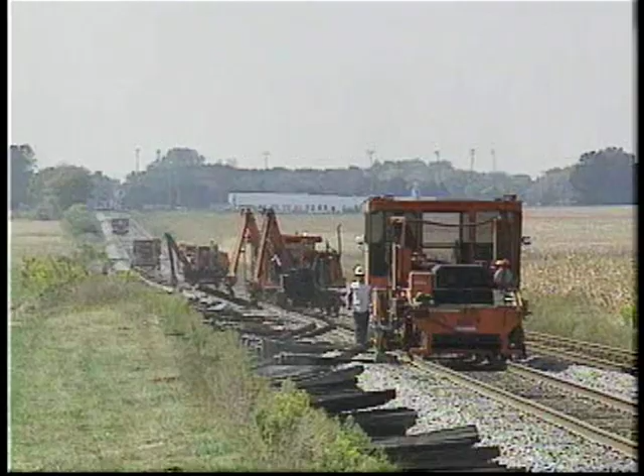On the track, we'll begin with a look at a modern work gang and their amazing parade of track machines. Tie and Surface Gang Number 1, Norfolk Southern's elite corps of highly experienced engineering and maintenance of way employees, is working across southern Illinois. These men are dedicated, fast, and excellent at what they do. They take pride in knowing that they are the company's best outfit.

The gang's job is to replace worn ties and then to resurface the line. This means to tamp ballast under the ties to lift the track level and to smooth out the alignment. To finish the job, ballast is groomed into the classic look of a high-speed mainline to aid in draining water away from the ties.

New cross ties have already been dumped along the line, and the first piece of equipment to lead the procession of machines is a tie crane. The crane operator positions ties near the location where an old one will be removed. The joystick controls respond to every movement, and the machine seems to become one with the skilled operator. Extra ties are placed on one of the carts. At a point down the line, these ties may be needed at spots where too few have been dropped.

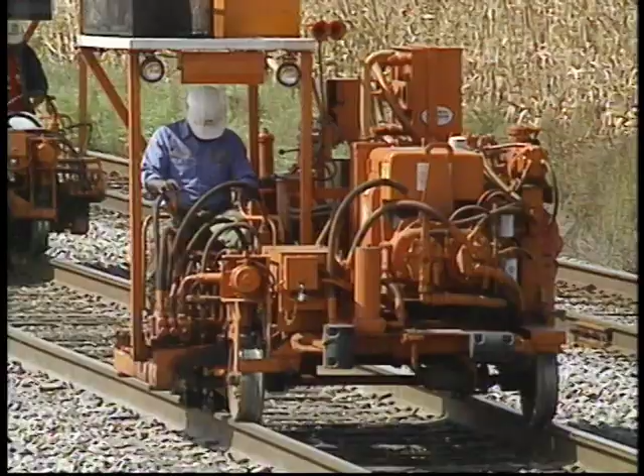Following right behind the tie crane are 4 spike pullers. These little machines pull spikes from the ties that are going to be replaced. Each machine pulls spikes from just one side of the track, but works both the inside and outside of that rail. The first 2 spike pullers will work a section and then leapfrog ahead to another section. The trailing 2 machines will work the section passed over by the first 2 pullers.

Hydraulics make a quick job of actually pulling a spike, but the operator must be skilled in placing the jaws of the puller directly over the desired spike. This is a task that often requires several attempts. Sometimes an operator gets in a groove and pulls several spikes without a problem. The little machines move right along, and in a good day, a T&S gang can cover several miles.

The removed spikes are dropped on the ballast and will be picked up by another machine, the spike loader. Here we see the strange-looking critter as it progresses along the line. Empty spike cans are stored on racks along the side of the machine. 4 large magnetic wheels pick up the spikes. A pair of wheels runs alongside each rail. At the top of each wheel, the spikes are forced off into a bin.

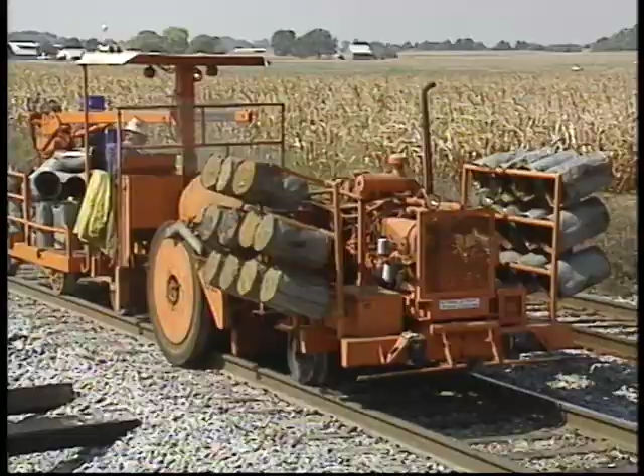From there, they ride into a rotating drum, which cleans the spikes by knocking off dirt and debris. From there, they are carried on a conveyor belt to the rear of the machine, where they are loaded into empty spike cans. Once a can is loaded, the operator uses the onboard crane to lift the can onto the back of the cart. The railroads today make a special effort to clean up all material and litter from a work site.

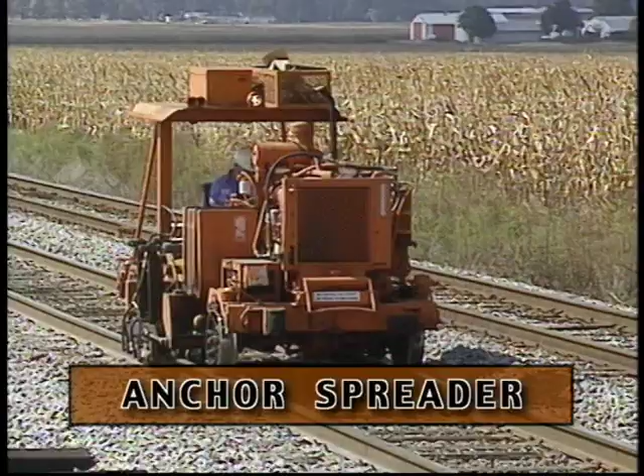Nothing will be tossed into the weeds or over a hill in today's world. The process continues with the arrival of the anchor spreading machines. The anchors are clips that hold rail longitudinally in place. A hydraulic press on this machine spreads the anchors apart to make removing the tie plates possible.

A close-up shows the anchor spreader at work, but it's difficult to actually see what is happening. The end result shows the anchor located several inches away from the tie and tie plates. 2 of these machines work together much like the spike pullers. Each machine has hydraulic presses that work the inside and outside of each anchor on both rails at the same time. A look down the line shows the next sequence of events that will take place.

A tie removal machine is busy pulling out the old ties that will be replaced. Behind that are 2 tie cranes that are picking up the removed ties, followed by another crane placing new ties at the exact spot for the insertion machine.

The tie puller latches onto and then lifts the rail to permit ties to be easily pulled from under the rails. The end of the puller grasps the ties as the arm of the machine drags them to the side of the roadbed.

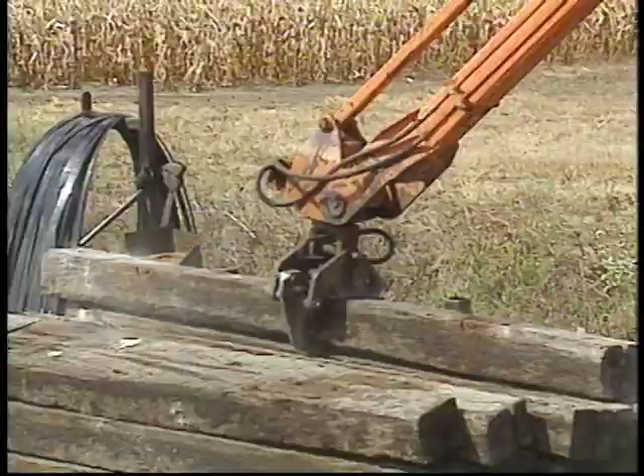Once 16 ties have been gathered, the man on the ground bands them with metal strapping. A spot is found where the bundle can be dumped without being in the way of the other machines. The cart is outfitted with a side dump platform, and the ties are shoved onto the ground. Rest assured that they won't be left here, however, as they will be picked up before the crew leaves the area.

The man doing the banding goes about his task as the tie crane moves down the line to keep pace with the other equipment.

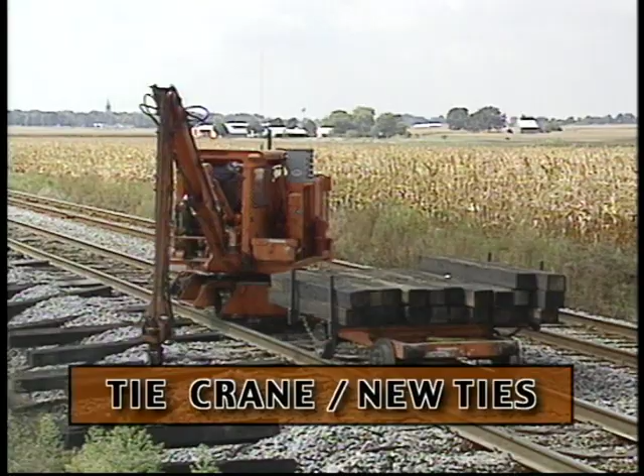Another tie crane follows, and its job is to place a new tie into position up against the rail for the tie insertion machine. Extra ties are carried along just in case the earlier operator missed a spot.

Again, note the skill required as the ties are placed in specific spots while the crane continues moving along the track. We speculate that these crane operators are pretty good at handling a computer game joystick.

When the machines get bunched up, it makes for a neat-looking sight as they go about their tasks.

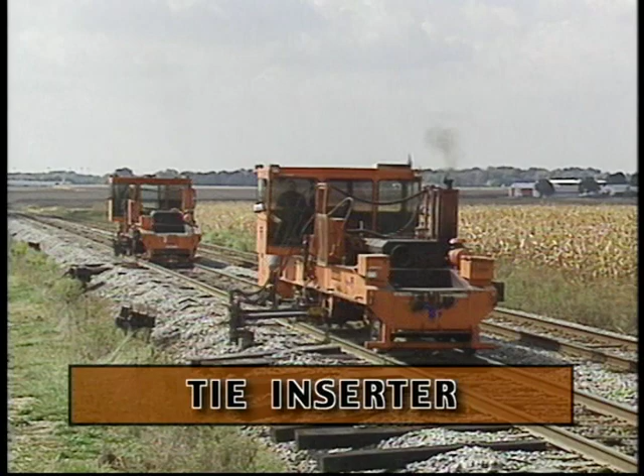Two tie insertion machines work like the other paired machines and leapfrog over a section while working the next part of the line. These machines are near replicas of the tie removing machine with one exception. Note that they do not lift the rail before inserting a tie. The powerful machine simply jams the tie under the rail to make a snug fit.

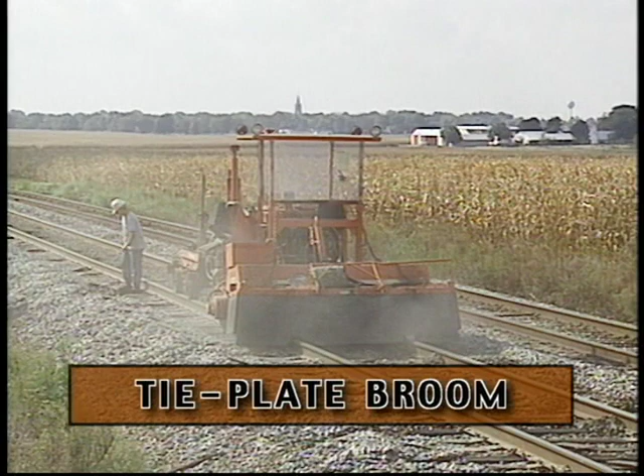A track broom follows to clean ballast from the newly inserted ties. It's necessary to keep rock off the ties so it won't get in the way when the tie plates are reinserted under the rail.

Rotating rubber brushes under the machine kick the rock off the ties, but also kick up clouds of dust. A man walking behind the broom controls the machine when necessary, but once a pace is set, the machine requires little attention. His primary task is to place tie plates into position for the insertion gang.

He uses a hook to help with the task and handles just one side of the track. Another man will do the other side ahead of the insertion machine.

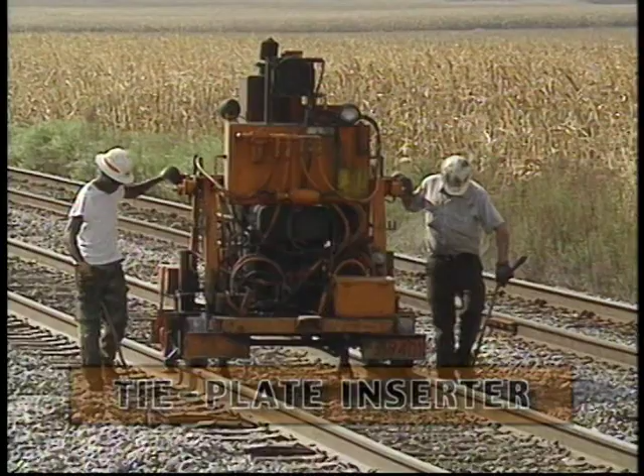Now, don't expect anything too elaborate of the plate insertion machine. It's mostly another manual task. The machine is there to lift the rail, but the plates are manually positioned by the two men.

The machine grasps the rail, and then jacks located on the bottom of the machine shove down on the tie. This action lifts the rail so the plates can be inserted. Again, hooks are used to handle the plates to save on back bending and fingers that might get smashed in the process. The trick here is to not get one's toe caught under the rail.

With new ties and tie plates installed, the next job is to spike everything down. Two automated spike drivers handle the task. Again, this is one of the jobs that requires a great deal of skill to line the spike up with the hole in the tie plate.

One man rides on each side of the spiker and is responsible for his side of the track. One spike is placed on each side of each rail on tangent track. On curves of more than 2 degrees, 4 spikes would be used. On severe curvature, heavier plates and spikes would be installed to hold the rail in place.

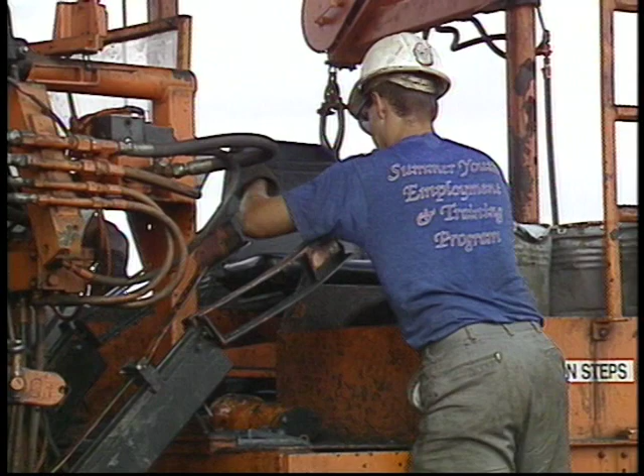The spike crew has stopped to reload. The procedure is much like loading a staple gun, but on a much larger scale. Once full, the spikes are lined up in their racks, and the crew is ready to go back to work.

Following the two automated spiking machines is a manual spike driver. The two men assigned to this machine check the line for missed spikes and ones that are defective or not driven in all the way.

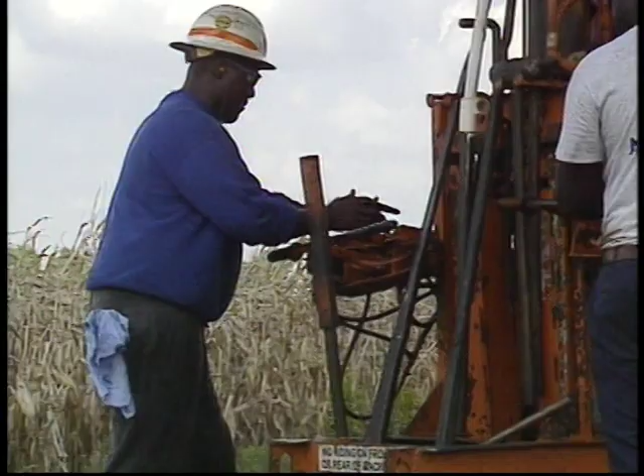Two more men on the ground walk behind the manual spikers to replace missing anchors on the rail. They simply place an anchor but don't have the equipment on their machine to press them onto the rail. This is done by another machine that comes along next. It uses a hydraulic press to squeeze the anchors around the bottom of the rail.

Once this group has finished their work, the track is ready to be resurfaced. We'll return to this same location the next day to cover the operation of those machines.

When a track gang on Norfolk Southern goes out to work in the field, they go as a fully self-contained operation that resembles a military campaign. The men eat, sleep, shower, and watch TV or relax in specially equipped truck trailers.

This is the kitchen trailer, where all of the meals are prepared by a full-time staff. One of the cooks is preparing soup for the evening meal and pulls flavor pouches from the steaming stock pots.

The men eat well on these work gangs too. This pile of thawing steaks will be for the evening meal. Next to the kitchen is one of the trailers housing a dining hall.

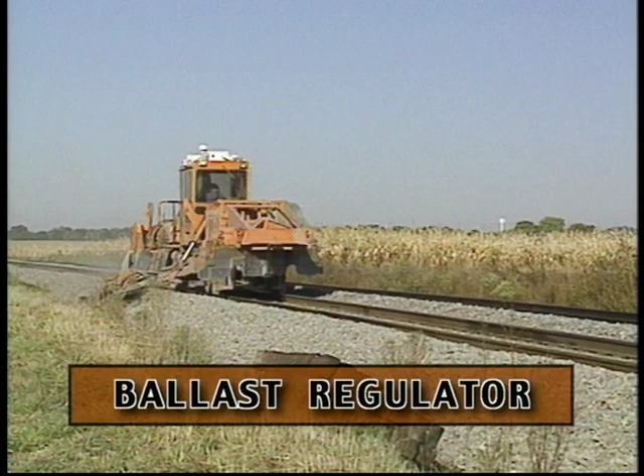The next morning we pick up where we left off and watch as a ballast regulator works the line. This regulator is piling ballast onto the track for the tampers.

Four tampers will work the line to squeeze ballast under the track, lifting the level of the line 2 inches on tangent track. The purpose of this operation is to smooth the surface and to correct any misalignment.

The box atop the end of this tamper sends a high-intensity beam of light back to photocell receivers on the main portion of the tamper. This tells the machine operator how much lift has been applied to the track level as it works the line.

While the tamper continues working, a westbound freight comes past the site. It's fortunate for the crew and the track gang that they are working along a passing track. Otherwise, either the train crew would be held up, or the track gang would have to get in a hole somewhere to clear up - a necessary time waster for all involved.

The tamper sticks its vibrating tongs into the ballast and squeezes the rock up under the ties. As it does this, the tamper also grabs onto the rail and lifts it up.

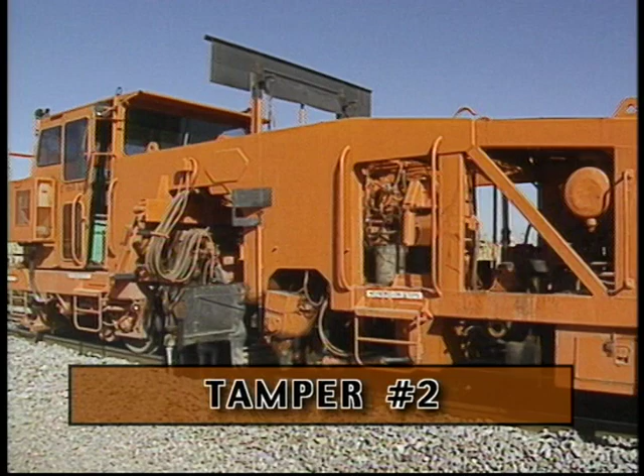The first of the two smaller tampers is also doing every third tie, and as you can see, doesn't operate with the light-sensitive measuring equipment. The fourth tamper is only used to make corrections to skewed ties, and therefore does not always have work.

Behind this tamper is a man who checks for any further problems with spikes or anchors. When he finds a spike that's not been driven in all the way, he has to resort to manual labor to drive it. This is a task that takes us back to the earlier days of railroading.

A machine called an anchor masher follows the last tamper. Its job is to squeeze the anchor snug against the tie plates.

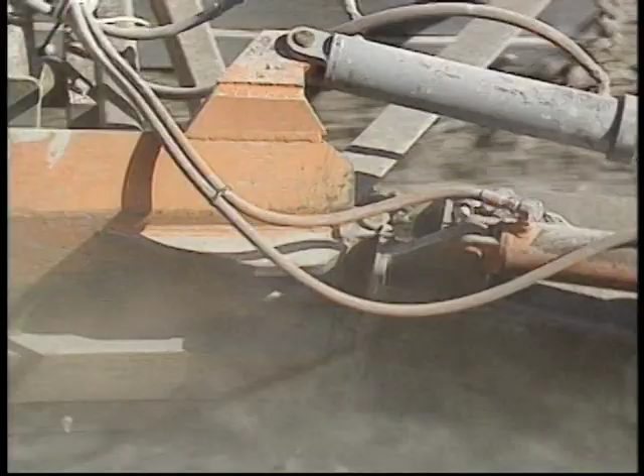On the next pass, the regulator has lowered its plow blades to clear a portion of the rock out from between the rails.

This time, it will use the front blade as a wedge plow to get more rock off the track and shift more ballast over to the south side of the line.

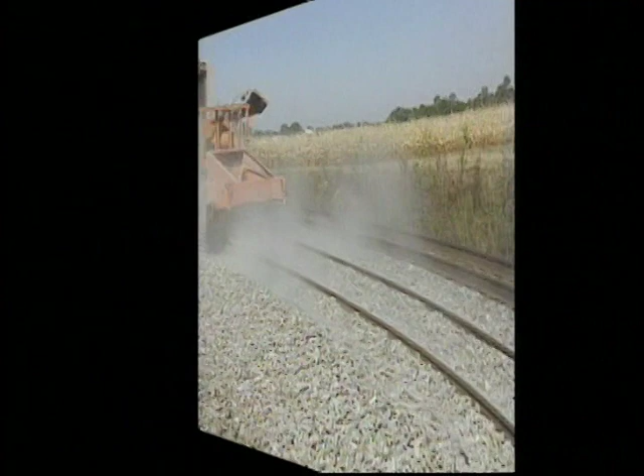Coming forward again, the blades have been adjusted to keep plowing rock to the south side.

Reversing once more, the rock continues to be shoved to the south side of the line.

Now coming forward, the blades have been formed into a wedge to evenly place rock on both sides of the rail. The side blades smooth out some of the lumps along this side.

This just about does it for moving ballast. And now the unit brooms the rock as it backs up.

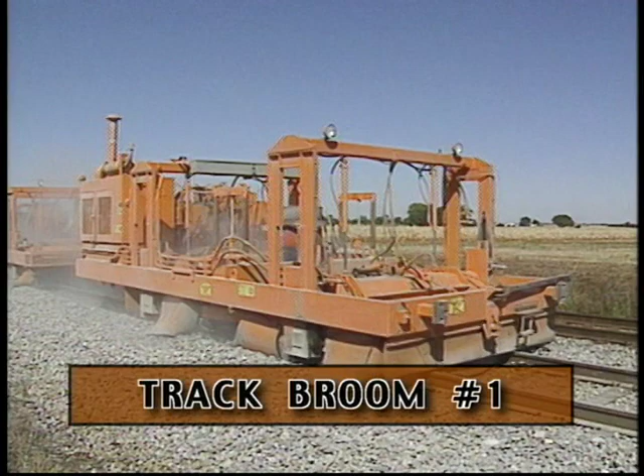This set of brooms has no operator on board, but is controlled by a man on the ground. Each broom has a specific purpose. The first kicks out most of the rock from between the rails. The second broom plows a channel of ballast from the end of the ties and cleans the portion of the ties outside the rail.

Once the dust has settled, we get a view of the freshly resurfaced line. Looks pretty good, and it's now ready for some high-speed running. Just one more task remains to complete this job, and that's to remove those piles of bundled ties.

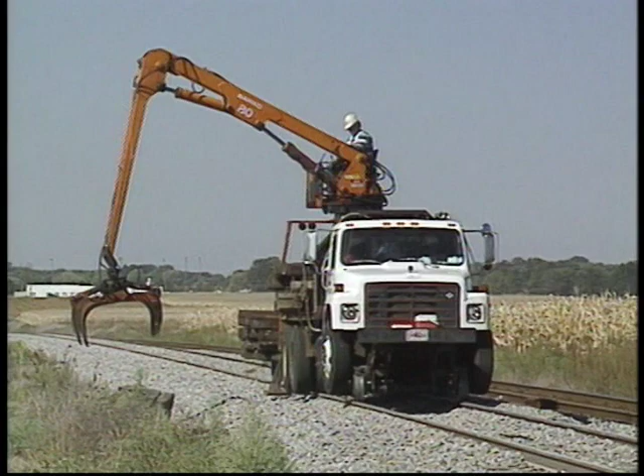A specially outfitted high-rail truck with a crane and pulling a trailer now arrives to collect those old ties. The operator swings the boom around and signals the driver to pull ahead to the next bundle. The forks latch onto the next 16 ties, and they're lifted aboard the trailer to conclude our look at the operations of a timber and surfacing gang.

Deep in the heart of Norfolk Southern coal country in southwestern West Virginia, we watch as a train of empty hoppers is hauled up a branch toward a mine. These gray-colored hoppers, called Top Guns, have become quite familiar in recent years to observers in the eastern part of the country. Norfolk Southern undertook a major program and rebuilt a total of 17,052 of these hoppers from older cars like these seen on the rear of the train.

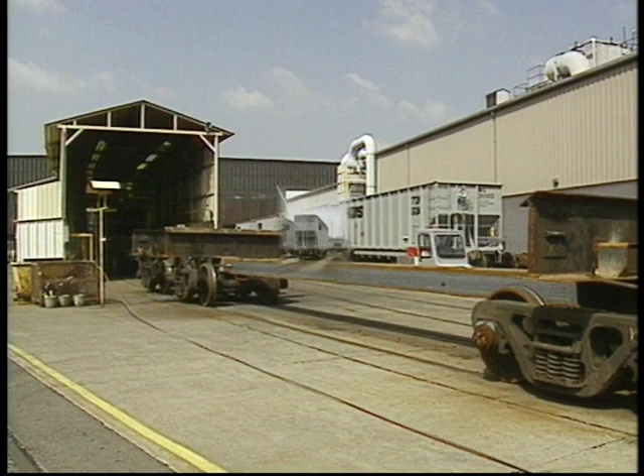The old cars are completely stripped down to just the center beam and bolsters at another location in Roanoke and then hauled to the assembly shop. Reusable parts such as brake valves are sent to other shops to be rebuilt and then returned here. Trucks are also rebuilt. Some cars are so deteriorated that even new center beams need to be built. All parts are identified with the car's serial numbers.

Before the assembly line begins to move, warning sirens sound to alert the workers. The line moves forward one car. The process starts at the end of the line and works back here to the start. The first stop is where cars are prepped to go onto the line. Rough edges are ground smooth, and if any holes need to be placed in the center beam, a plasma arc cutting torch is used for the job.

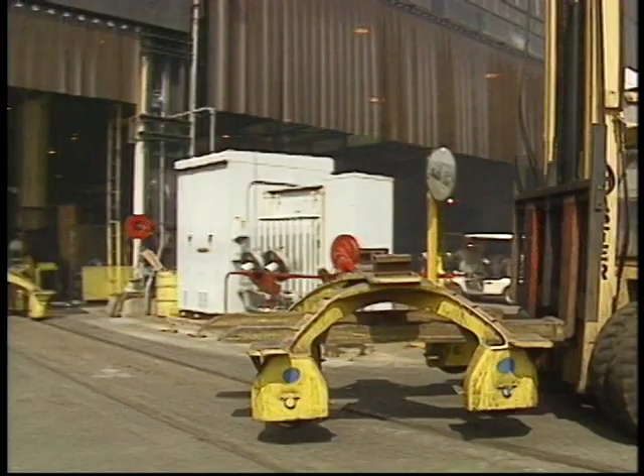The center sills will be removed from their trucks and ride on these shop bogies along the assembly line. Inside the shop building, the first station prepares the male center casting. New metal is added where it was worn to bring it back into specifications.

The coupler pockets are prepared and new angle iron is attached to the center sill. These braces will help support the floor and sides of the car. You can see that we are about 3 stations down the line now, and the car is ready to have the bottom attached. An overhead crane lifts the chassis over to the station where this will happen.

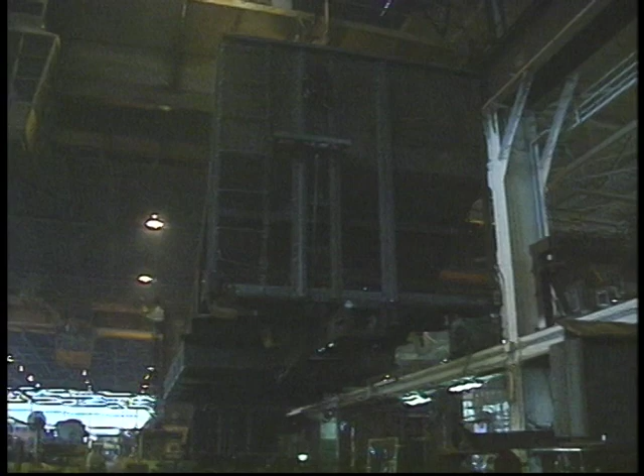Once both end pieces are attached, the car is lifted back to the line and placed on shop bogies again.

The line moves forward, and at the next station, the car will have welds required up to this point completed. Offline, we see side panels being built as they come through a giant press. A couple of men work with massive drills, boring holes at specific locations in the panels.

Welders begin the task of sealing all the seams on the car. On the other side of the building, more welding is being done on almost completed cars near the end of the assembly line.

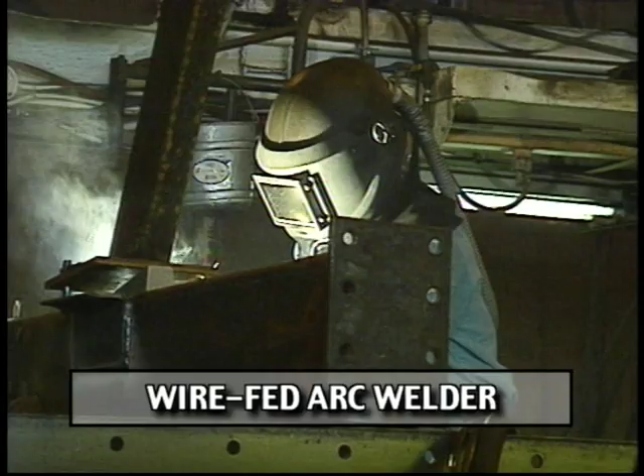Major welding gets underway now to attach inside bracing before the sides are brought over. The electric arc welders are wire-fed, meaning that a continuous feed of welding rod is automatically fed to the tip of the welder. This makes the job go much faster, since the welder won't have to stop work to pick up another rod.

At the far end of the building, a crane has just picked up a side panel and is headed this way with it.

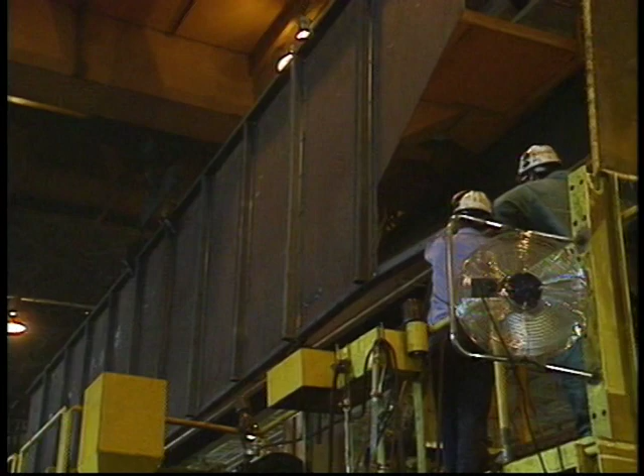The crane lifts the panel up high to clear the rigging of this work bay, where the panels will be attached to the car. The sides are slowly lowered into position, and a worker guides the panel to just the right spot. A rivet is quickly placed in a pre-drilled hole to help hold the panel in place.

At the end of this portion of the line, cars are pushed onto a transfer table and moved to the return portion of the line. The cars now have the final shape of a coal hopper, and on this line they will have the rest of the welding done and all of the appliances added, such as air lines, brake valves, reservoirs, ladders, grab irons, hoses, and so forth.

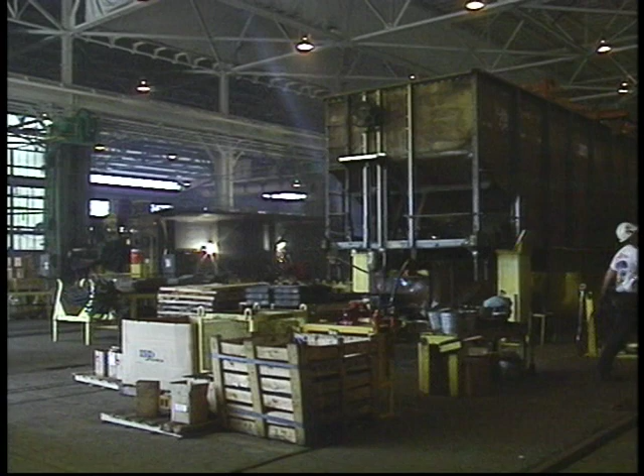We've relocated now to the end of the line. The car in the background is having the final welds done. After the next station, the cars are picked up by a crane and moved offline to the next to last station before the paint shop.

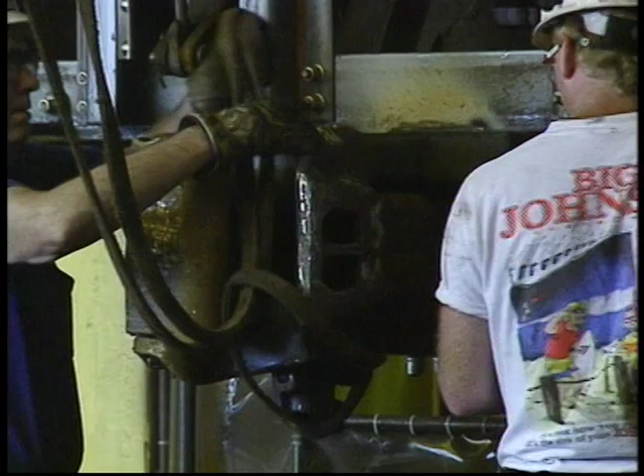Here, couplers and air hoses are added, and we watch as a coupler has just been placed on this car. All that remains is to place the completed car on its trucks now. The rebuilt trucks are rolled onto the shop floor and must be turned to line them up with the shop tracks.

One at a time, a winch pulls the trucks onto a miniature turntable where they will be turned. The second truck is turned, and then the pair are chained together, and another winch pulls them ahead to the final station in the shop building.

Soon, the overhead crane lifts the newly constructed car body out of one bay and onto the trucks. Some final adjustments will be made once the body is in place, and several more items will be completed before the car is ready to enter the paint shop.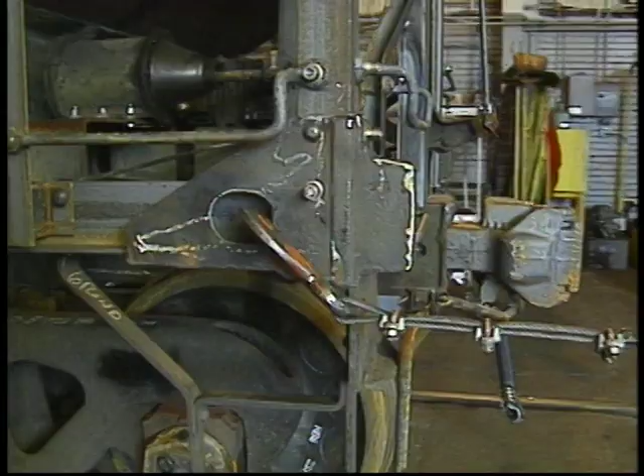The car is painted gray in an automated process that is impossible to shoot due to the way the paint is applied and the environmental recovery system in the downdraft water wash spray booth. The special paint does not require the bare metal to be primed. Once the car comes out of that bay, it's ready to be stenciled, and the Norfolk Southern logo is painted onto the side panels.

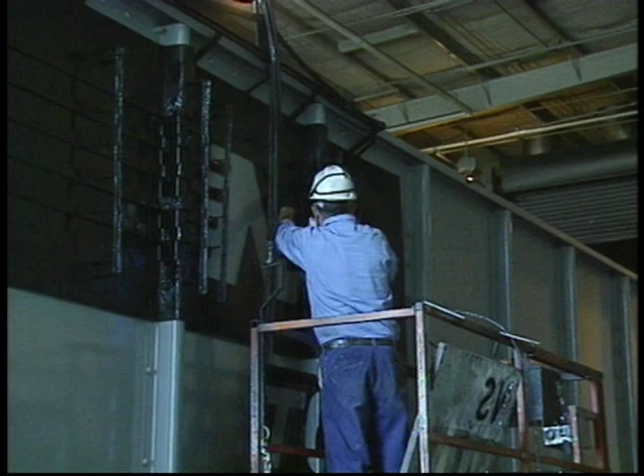The big stencils are removed by a small overhead lift, and then the car number is painted using handheld stencils. All of the other information seen painted on car sides is added to complete the job, and car number 31101 is now done. In a couple of days, it'll be in the coal fields, earning revenue for the railroad.

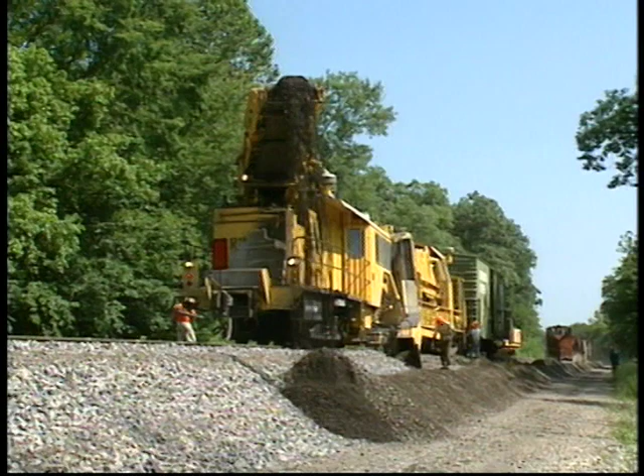During the summer of 1998, Burlington Northern Santa Fe undertook a major construction project to rebuild its Thayer subdivision in Arkansas and Missouri. The busy line was completely shut down for two weeks during what the railroad called the Blitz. One of the project goals was to undercut approximately 40 miles of track.

Undercutting is exactly what this massive machine is doing. As it slowly moves up the line, dirt and debris are removed from the ballast and discarded to the side of the track. How this material is extracted from underneath the cross ties is the really neat thing about an undercutting machine.

Scoops located on each side of the undercutter collect material and transport it into a vibrator which separates the ballast from dirt and debris. The material is removed from under the track by a mechanism that resembles a large chainsaw blade. Large teeth rotate on a band that is suspended under the track. As the teeth whirl around, they kick out the ballast and debris for the scoops to collect. A metal wheel on the machine lifts the track while the undercutter blades are moved along underneath the ties.

The view from behind the scoop shows concrete ties suspended in the air as the track is coming back to rest on the ground. It's nearly impossible to see any part of the actual undercutter blade while the machine is working.

Notice the different level of the track before and after the dirt has been removed. Fresh ballast will be dumped on the line after undercutting is complete, and then the line will be tamped and regulated to complete the job. The vibrator separates good ballast from the dirt and debris, and then the junk is moved by conveyor belt off to the side. On this particular portion of the line, there is not much ballast left. This is one of the reasons the line needed to be rebuilt.

Inside the climate-controlled cab, the machine operator adjusts controls and constantly checks on the machine's performance to ensure that the job is being done correctly. We'll take a moment to just watch as the machine continues to work up the line.

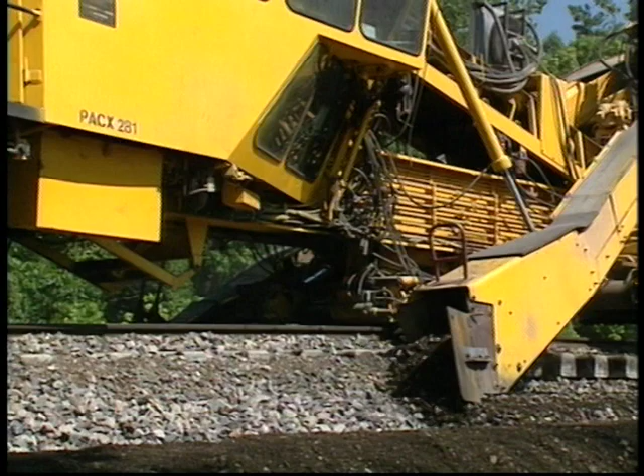This unit is an impressive machine, but not the largest of undercutters. Take a look at this one, which is also operating on the Thayer Blitz. This machine is actually a series of machines working together.

The first section is cleaning ballast from along the sides of the track, but is not undercutting. The second section is an undercutter and is working just like the smaller version.

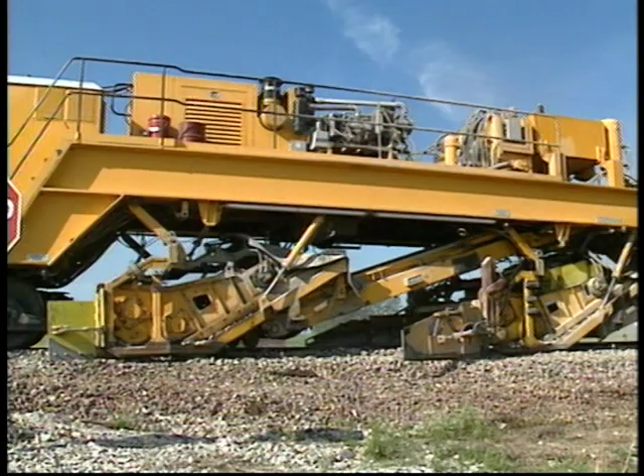Plows along each side of the first section move ballast into the center of the track, where it's picked up and moved into trailing vibrator cars. The material is moved from one car to the next on a series of belts, and the debris is later dumped trackside from the boom conveyor.

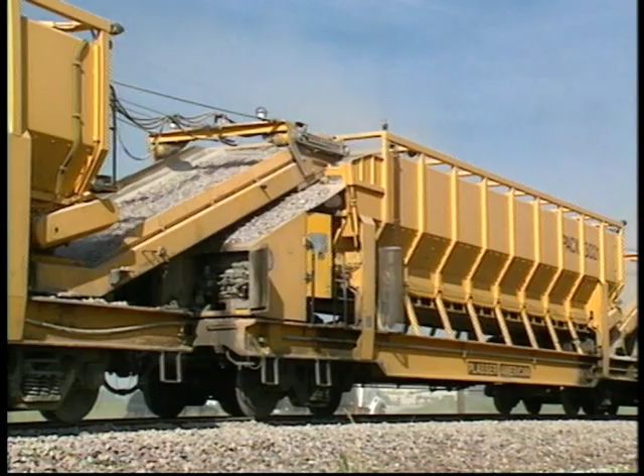The second section of this massive machine is where the actual undercutter is located. It functions exactly like the smaller machine, with the rotating blades moving material out from under the track and the side scoops collecting and transporting it into another vibrator.

Here we see the track being lifted out of the ballast as the undercutter blade approaches. A major difference on this portion of the Thayer sub is that there is actually plenty of real ballast here, instead of mostly debris like at the other location.

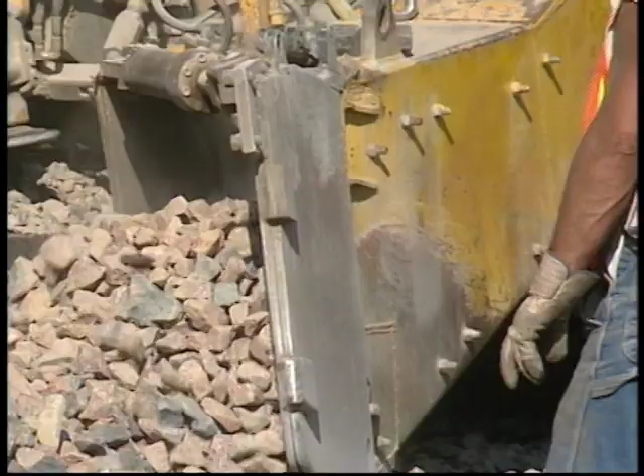Like the other machine, this one also has a climate-controlled operator's cab suspended above the action to monitor the operation.

Having a lot more ballast to work with in the first place, much more of the material is being returned to the track instead of being discarded.

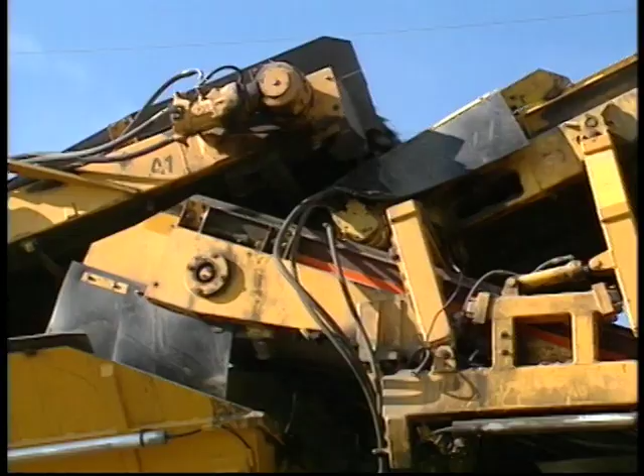What we're seeing here is the back side of the undercutter blade under the track. Since the teeth are moving at a high rate of speed, it's difficult to actually see them. However, if you look very closely at the bottom of the blade, you can detect rapid boring movement. The housing around the teeth prevents us from being able to see more of the action.

Once the machine is stopped for maintenance, we finally get a view of the rotating teeth and can actually see what they look like. They run around the oval-shaped guide, similar to the way a chainsaw operates.

Although a fair amount of debris is being discarded, it's nowhere near the amount that was being removed from the other portion of the line.

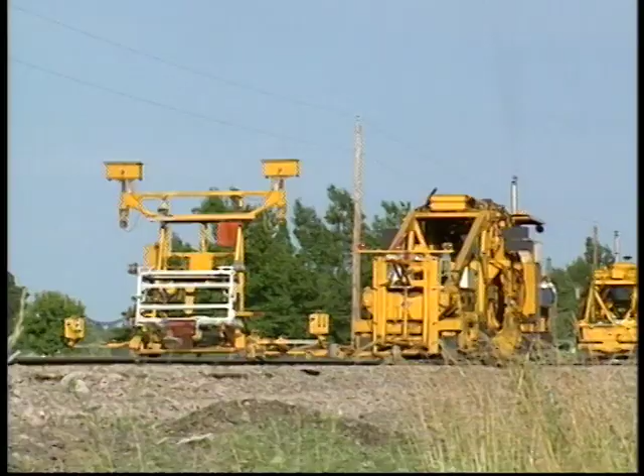Behind the ballast regulator are 2 different tampers. The first is outfitted with a high-intensity light system to guide the leveling and alignment of the track. Behind it is a smaller-sized tamper. Bringing up the rear of the fleet is another ballast regulator. This one has the job of grooming the ballast into that neat mainline appearance that helps drain moisture away from the track.

Years ago, trains ran by timetable and orders. Until fairly recent times, this was still the rule in Mexico, where these scenes were obtained in 1990. Telegraph messages were transmitted up and down the line to notify station operators when it was necessary to type Form 31 orders for a train. To communicate with the crews, stations used order boards to notify approaching trains if they had to stop or slow for new orders, or if it was okay to proceed.

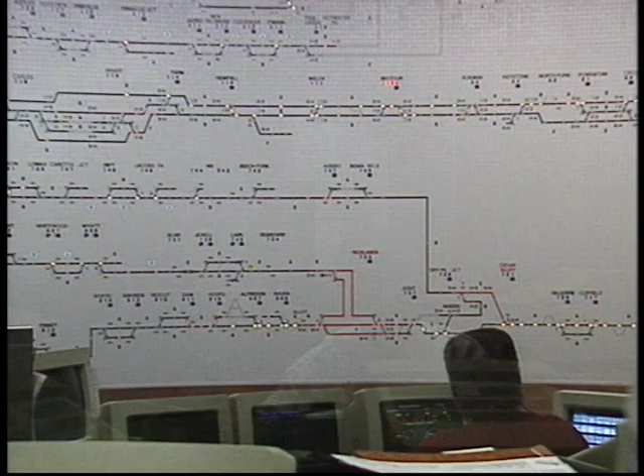Today, that has all changed, and modern dispatching centers like this now control the flow of traffic across high-density lines. We're visiting the dispatch center of Norfolk Southern's Pocahontas Division at Bluefield, West Virginia. The big board running the length of the room reflects all of the track within the division that's controlled by centralized traffic control. In a glassed-in room behind the dispatchers is where you'll find Chief Dispatcher Tommy Johnson.

He's a busy man, but in just a few minutes, he'll be able to give us a rundown on what happens here. And that's Chief Johnson. Hey, Tommy, this is Jerry. The chief is a crisis prevention coordinator who keeps the division fluid.

Let's listen as he handles some typical issues before they become problems. The next train through is going to be, well, you got that grain train I'm telling you about. It's got 49 Norfolk grain, 131 Tidewater. And then behind him, you got the dust train. And then behind him, you got an 820 off the Clinch Valley. He's going to have 130. Now, I don't see another Tidewater train behind him till I'm coming out of Allville with the rest of that 5061M. I'm going to bring it up here and set it off at Bluestone, then go back to Wilco and get those Katy, come back up and fill out.

I'm not sure how many that's going to leave. I'm going to have to do some figuring where I can tell how many that's going to leave me short.

Hey Rick, how big's 129 going to be east of Kenova? We can't see anything on that 129 yet, we don't have it in the computer yet. They added one car at Columbus and they haven't got it in the computer yet, Tommy. Can I call you right back? Yeah, okay, I'll try to see what it comes out and call you right back.

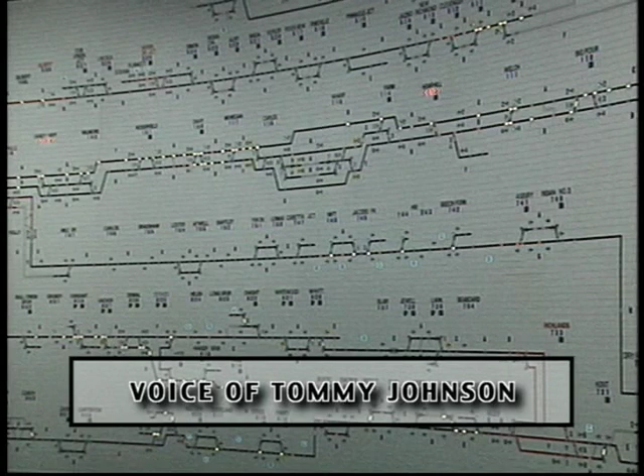Basic overview of the board so you understand what the operation is. All the black lines indicate the signaled track. That represents about half the track on Pocahontas division, and that's what's signaled. The rest of it is branch lines that go up to mines that aren't signaled.

Each name with the number under it is a control point where the signals and switches are controlled from. The dispatcher has one keyboard dedicated to that function. So what they do, if they want to request a signal or a switch at a certain location, they'll call that location up on their keyboard. It will light up white, and they can ask for a signal or a switch, and then they have the ability to cascade ahead as far down as they want to go.

The red lights on the board indicate the track is shunted, either by maintenance equipment or by a train. For example, up there at Elkhorn, there's a red light - it was in the tunnel, it's moved down. The little green light indicates that at Mayberry the signal's lined for him and the route's lined for him all the way down to Big 4, where you see he's crossed over from Main 2 to Main 1 track. See the green light blinking?

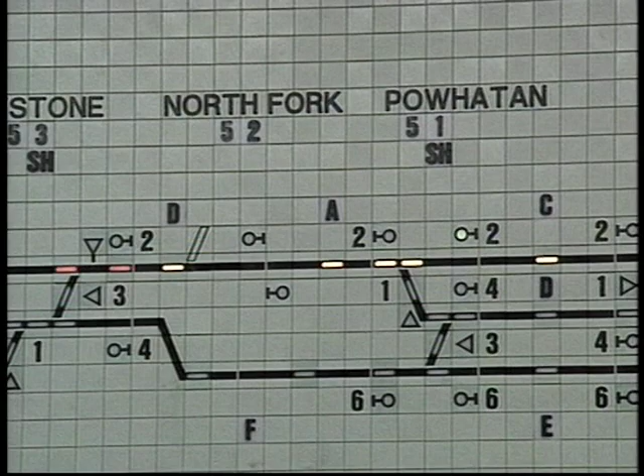Right, all right, then there's a train ahead of him. There's a red block, so that green light will continue to blink until that train moves forward enough to allow that signal to come in. That's all handled through relays in the field.

When you see these red control numbers blinking from time to time, that's when the dispatcher asks for a signal to be lined or switched or any field function to take place - it sends a request out to the relays in the field. The relays act on that request and then send an indication code back to the dispatcher, and each time that's received and sent, those little red lights will blink. They'll blink again whenever something takes place that affects them. For example, if a train moves up to another block or the track is shunted for some reason and the signal is knocked down in the field, then you'll see a little red light flash, and that's sending an indication back to the dispatcher that area has had activity.

The other thing this computer does - he's got two, as you see, we call them train summary CRTs - he has that because he has more than one page of trains. One's eastbound and one's westbound, it's divided in the middle. And when those red lights blink up there, they automatically track the trains and send the control back to this CRT telling him that train went by Mayberry at whatever time it went by. So that helps him keep track of where the trains are.

That basically explains the board, except, like I said, the blue blocks indicate track shunt or track protection for on-track equipment, men and machinery working on the track. That's an office function, and what it does is it prevents the dispatcher from requesting a signal into that section of track for the protection of the men working.

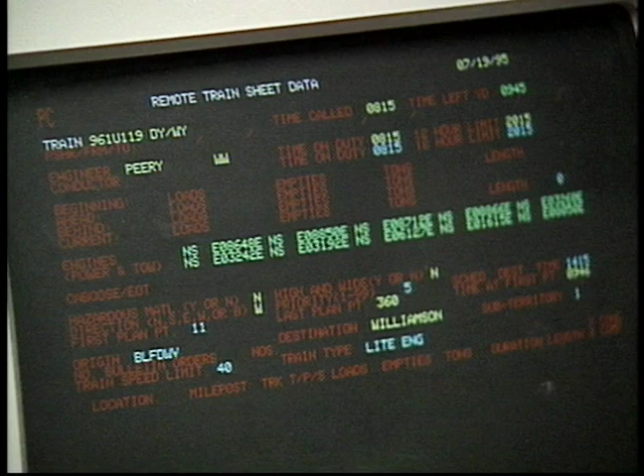The tube on his far right, with all the little squares, is the communication tube for all the radios on his territory. If someone calls him up and codes the radio, it begins to blink, and he accesses its touch-sensitive screen. He has 4 keyboards.

The black one is for his signal and switch functions. The other one on top is for his mainframe and track warrant computer, and these other two are each tied independently to a CRT. It's heavy on keyboard configuration. We're working on updating that now.

Just as soon as the Pokey sub-dispatcher finishes a job, he'll give us a rundown on everything that's happening across his territory between Bluefield and Glen Allen, a distance of 80 miles of high-density railroading.

Yeah, we'll just have to take a few minutes. Oh yeah, it's all gonna be tied up there for a while. Yeah, but I've got a coal train right behind him. I'd like to go ahead and run him too, and he can be getting a pusher on while we're down there, while your U-19's out there making his move. As long as I got your support, that's all I need.

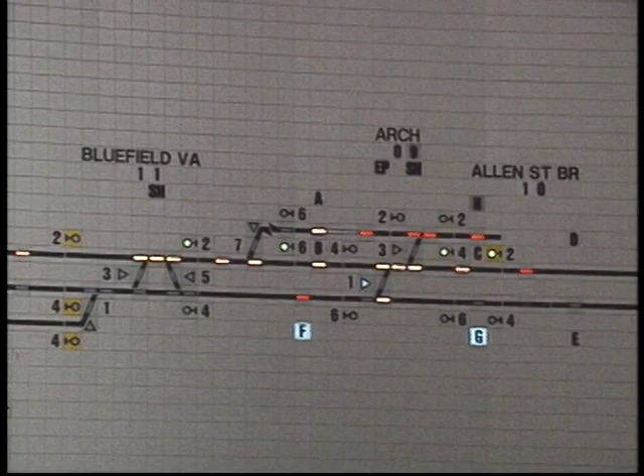And we get on down to Falls Mills, going west on Main 2. That is a pusher, 1-engine pusher, who's going west to meet up with the time freight that's coming east. Main 1 track, Bluestone to Crozier, is welders working in the crossovers at Mayberry.

It's where it's red. And just by Mayberry, going west on the Main 2 track, that is a set of light engines going to Auville. And just by Powhatan is a pusher, which is also going down the road to meet up with another coal train.

And let's see. Approaching Norfolk is a hopper train, the 857. That's 178 empties going to Auville.

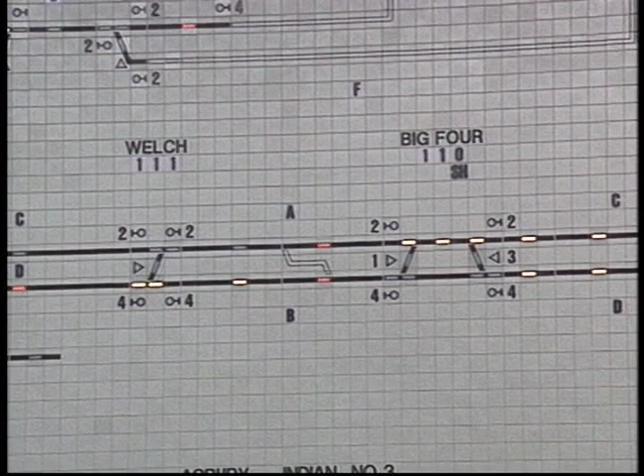And waiting at Hemp Hill on main 1 is a pusher to go west. And ahead of him at Farm is another pusher on main 2 track, going west. Just by Caples on the main 2 track is a light crew, 658 going to Auville, where he'll eventually die at Auville and taxi on to Williamson from there.

In the middle track at Farm, waiting to come east is a 856 with 130 loads of coal. On main 1, which is bottom track, waiting to come east is Coal Train 564, 118 loads coming to Bluefield.

That brings us all the way down to, next thing I've got going on is there at Auville. And there at Auville, crossing over, going east on Dry Fork main line, which is right here.

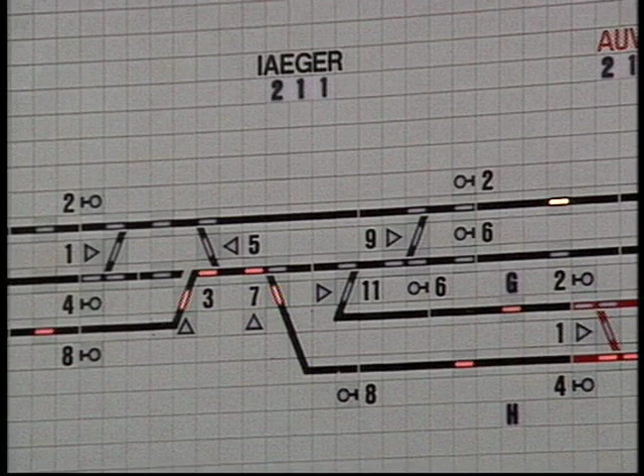Next thing we got is a crew here at Hull on the main 2 track. And he's pulling loads out of Litwar, which is where the switch is flashing there now, that little block there. He's going to pull loads out of there and pick up out of the middle track, which is here. He'll pick loads up out of that middle track there. Then he'll go on west to Williamson eventually.

Next thing coming by Panther is the 864, Coal Train 100, with only 73 cars. He'll be getting the pusher we've got parked on the east leg of the Y at Iaeger, and he'll come on to Bluefield eventually.

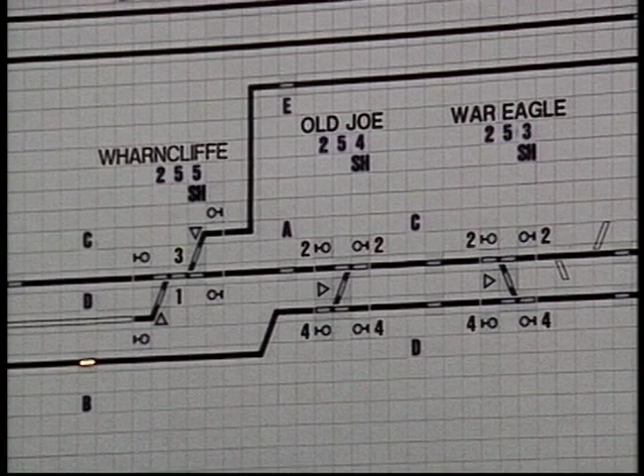Y'all taxi to Auville again, get another train? Nope. All right, appreciate it. All right, we'll see.

Returning now to the Burlington Northern Santa Fe Thayer sub near the Arkansas-Missouri state line, we'll be taking a look at one of the most awesome pieces of track equipment ever built: the P811 concrete tie laying machine.

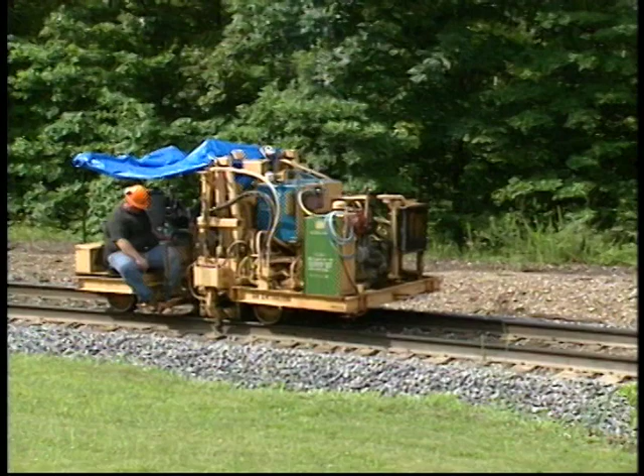Running several hundred yards ahead of this amazing contraption is a simple spike puller. Another spike puller is physically connected to the P811 machine, which we'll see later. Using this additional puller speeds up the overall operation of the tie laying crew.

These guys will not remove every spike, because the P811 is being pulled by a heavily laden train carrying all the concrete ties that will be used today, plus all the old wood ones that have been removed.

The train follows the spike puller several hundred yards behind it. As the locomotives creep slowly around the distant curve, we get our first look at the old ties piled on specially equipped flat cars. Part of what's so unique about the P811 is that the machine is supplied with new ties as it rolls down the line.

We don't know if it's by design or just happenstance, but the work train is being pulled with a post-merger set of locomotives: a Santa Fe GP38R leads a Burlington Northern GP39M, rebuilt from and still looking like a GP30.

The engineer's job on this work train is quite demanding. It's extremely important that the train be operated at a constant speed, keeping in mind that these locomotives are pulling the P811 down the track as it removes and lays ties. Any problem occurring on the P811 requires the immediate stop of forward motion. Wheels slip as the two diesels creep forward, maintaining a steady pace.

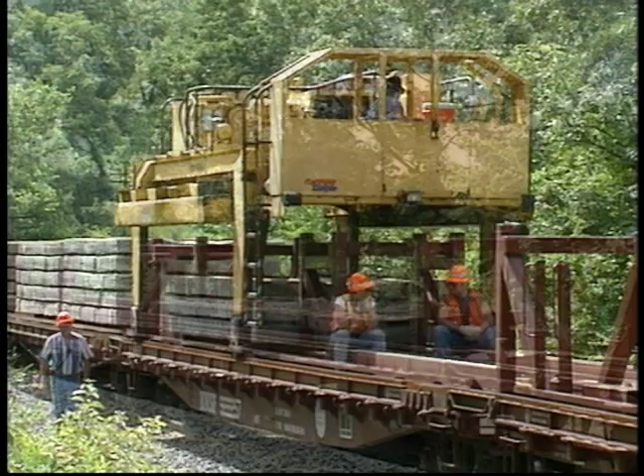The operator now grabs a flat of concrete ties to deliver to the second crane. That crane will deliver them to the third crane, which in turn will deliver them to the P811.

Two workmen have been assigned to the rather easy task of removing planks used to separate the flats of new ties. On this project, over 52,000 concrete ties will be laid in curves along a 25-mile stretch of the line. Wood ties will remain in place on the tangent portions of track.

The first crane soon returns with a load of old ties and runs right over top the two workmen, who keep low while this is happening. As a bit of humor, one could say that these guys are sitting down on the job, laying low and getting paid for it.

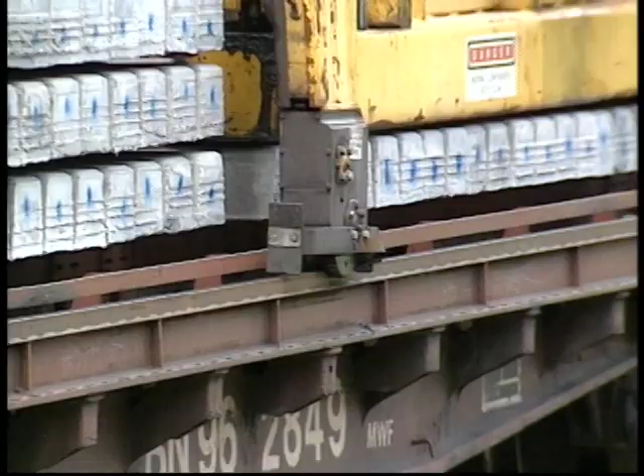From time to time, the train comes to a complete stop while a problem is resolved on the P811. It's soon moving again, and a view toward the front shows how many ties have already been handled today. The train is serviced overnight, so each morning when the crews begin work, all of the flat cars are loaded with new ties.

A close-up shot shows how the cranes roll along the tracks on the flat cars.

Gantry crane number 2 arrives with a load of old ties. Notice that each crane operator wears a communications headset so they can keep in contact with one another and the job foreman.

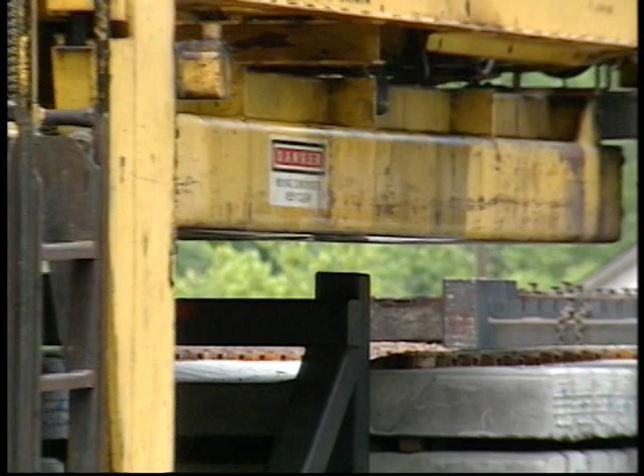As crane number 3 picks up a load of new ties to complete the relay, we get our first view of the actual P811 machine, and the excitement grows as it nears our position.

The first portion of the machine has a plow attached, which clears ballast from each end of the ties. This makes room for additional ballast to be removed later on when the old ties are lifted out of the roadbed.

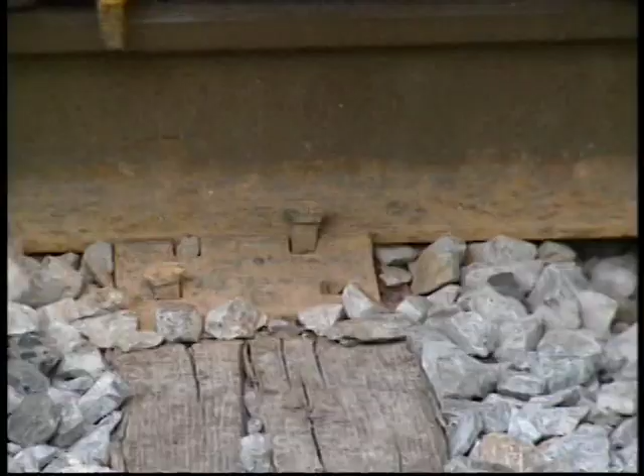A spike puller trolley runs along underneath this first car of the P811 to remove the last of the spikes not taken out by the first machine. All spikes must be removed at this time.

Back on the main part of the P811, note 4 things that are happening. New ties on the top platform are being fed into the machine, and old ones are coming out on the bottom platform. On the ground, you can see the additional ballast referred to earlier that's being kicked out from under the P811. The other thing to note is how the rail is being lifted around the machine, which can be seen beginning under the man standing by the green duffel bag.

Guides attached to the machine force the rail off the ties. Additional guides continue to force the rail to the outside and around the P811. This shows the resiliency of continuous welded rail.

Crane number 3 arrives to feed a load of new ties into the machine and will then leave with a load of old ones to deliver back down the line.

It's easy to see how timing is an essential part of this machine's operation. If new ties aren't delivered fast enough, it will run out, or if the old ties aren't removed quick enough, there will be no room to store anymore.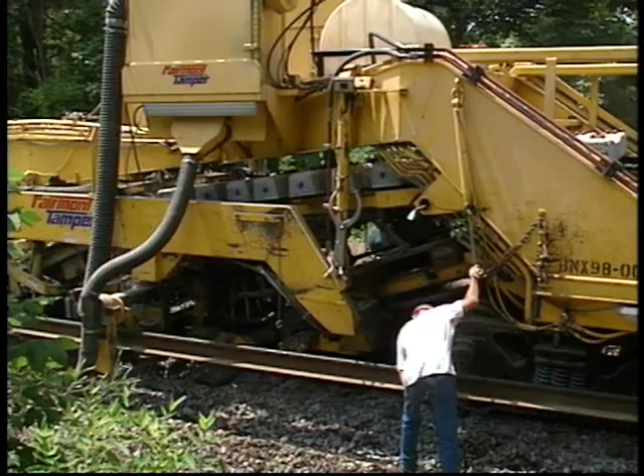As we view the mechanism removing old ties from the roadbed, the thought might occur as to how this huge machine supports itself without there being any rail for it to ride on. A close-up shows just how that is accomplished. A tracked platform crawls along under the P811 to support the weight that would normally ride the rails.

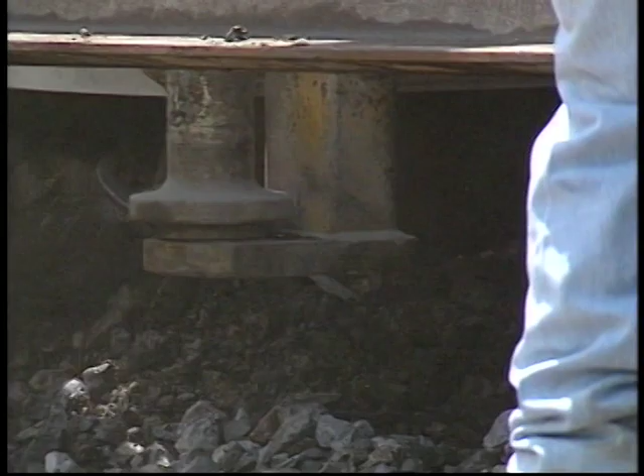As the old ties are lifted from the roadbed, a set of rotating teeth like those found on undercutter machines removes ballast. This creates a trench where the new ties will be dropped in place.

With all the moving parts on this machine, the operating crew must constantly be alert. Letting one's mind drift for a moment could easily result in serious injury. To help alleviate this possibility, the men rotate positions often to keep sharp and to rest.

Two at a time, the ties are loaded into the mechanism that drops them into place. Once dropped, another part of the machine pushes each tie ahead a few inches to help seat them into the ground. The ties come from the plant with metal guides already in place that automatically gauge the rails.

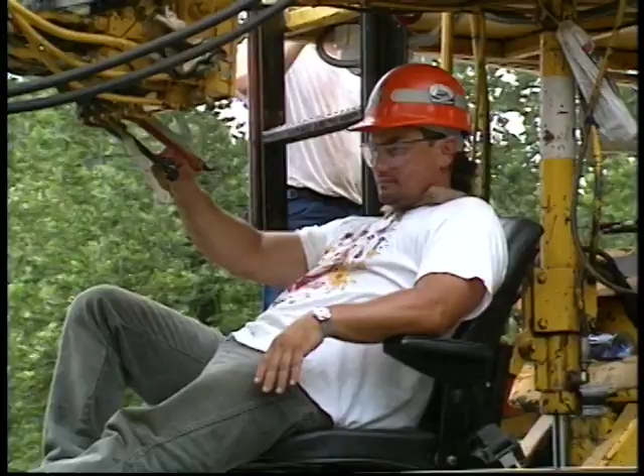Behind the insulator crew, guides on the machine force the rail back into gauge. Now this fellow looks like he has it made, but he's actually performing a very critical job. He makes final adjustments to the guide arms to properly seat the rail onto the ties.

A set of wheels on the rear of the P811 are the first to roll over the newly laid ties and help to further seat the rail.

This absolutely amazing machine is a marvel to watch. We'll take just a moment to once again view it in operation as it continues up the line at about half a mile per hour.

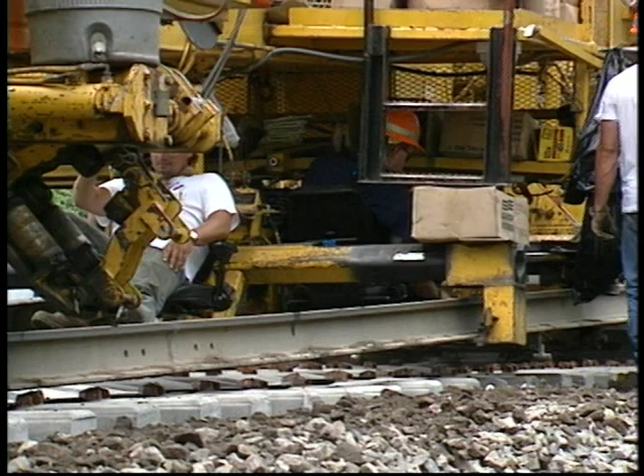Once the work train is well clear of our location, we get an open view of the newly laid ties. However, this job isn't finished yet, since the rail has not been fastened to the ties.

The first thing to happen behind the P811 is for a tamper to work ballast up under the new ties. The tamper straightens up misaligned ties and provides a firm foundation for them to rest on.

Behind the tamper comes a machine that will clip the rail to the metal guides on the ties. A total of 4 men ride the machine, 2 on each side.

The first 2 place insulators on the bottom edge of the rail, where it comes into contact with the metal guides on the ties. The following men set the rail clips, which will be mashed into place by a hydraulic press located to the rear of the machine.